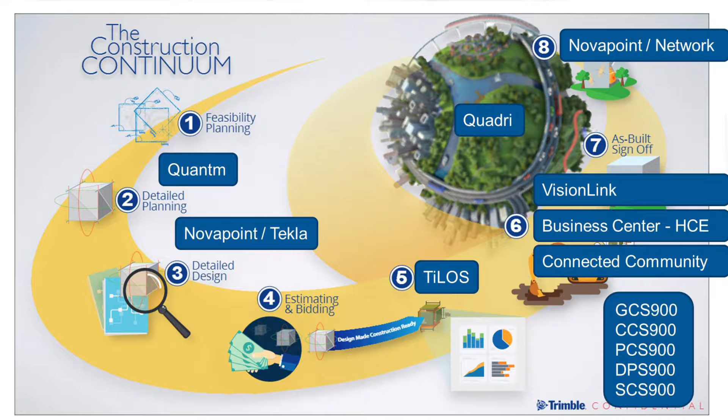And in the Trimble ecosystem, we are able to deliver the software, but also we are able to, with our partners SITECH and Geotrim, deliver all the equipment needed to make the thing happen.

In the Finnish market, we started several years ago the work on how to make this data flow more efficient, and it shouldn't be based on some programs. It should be open standards, where you are able to use the data in models and also get as rich information from design phase to design phase without losing data between those.

So in year 2015, we got common InfraBIM requirements - a documented way to make data models in infrastructure design. That was a huge job to do.

And as you see, everything starts with this Infra Model Data Exchange. It's a format - a LandXML based format, which has been made richer for the Finnish market. We call it Inframodel 3 LandXML, and you get the data from the software to the construction site with the Inframodel format, and you are able to read all the necessary information and metadata through the format.

But then we had a problem. We had the format, but people didn't know how to model things, how to name the models, what are the subsurface names, is it the top surface or lower surface - that discussion started. So we made this classification system for modeling purposes.

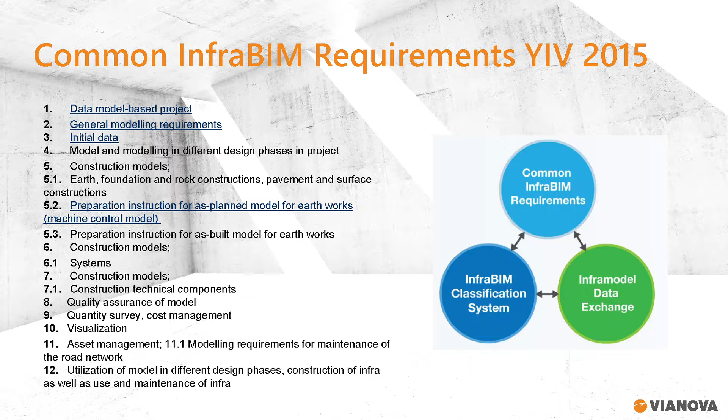And also we copied some from Norway - they have this Handbook 138. So steal with pride, use what someone has already done.

Maybe the most important thing is that it's under Building Smart. Building Smart Finland is responsible for keeping those requirements up to date. There's all the time something new coming to the data exchange.

Also, we fix the classification system and the requirements, and there is a group of people and specialists who are going through all the time the needs of the market and trying to respond to these issues as soon as possible. And then we share this information with all the people in the market.

There have also been over 35 pilot projects - it's in Finnish, but it's roads, railroads, bridges, streets, different types of connections with all of those, and then we have maritime or waterway projects where we have tested these requirements.

And all the pilot projects make a report back on what was good, what was bad, what we should develop further. But if you visit infrabim.fi/eng, you get the English version and you are able to read the documents.

Unfortunately, the pilot project reports are in Finnish only, but maybe the most important thing are these three issues. That was a big job to do, but nothing happened.

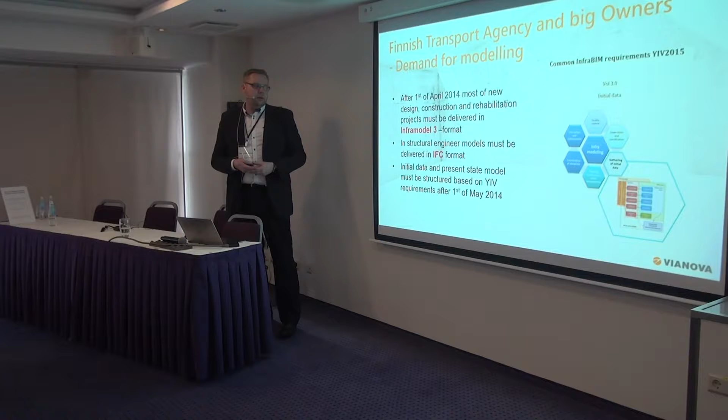Also, from the 1st of May, the initial data and present state model has to be delivered based on these common InfraBIM requirements. So everything has to be documented when you deliver to the next phase. That was a key issue there.

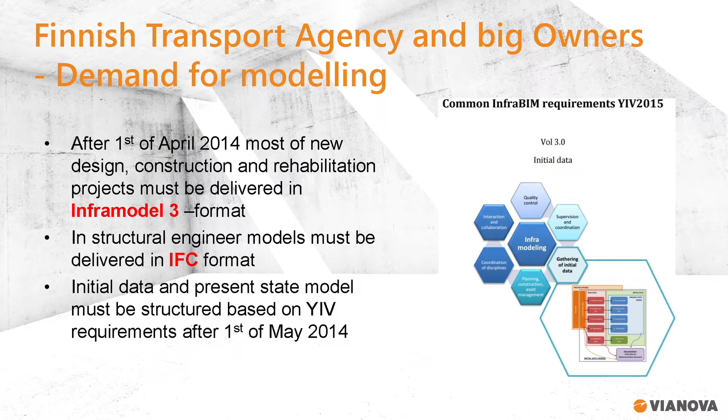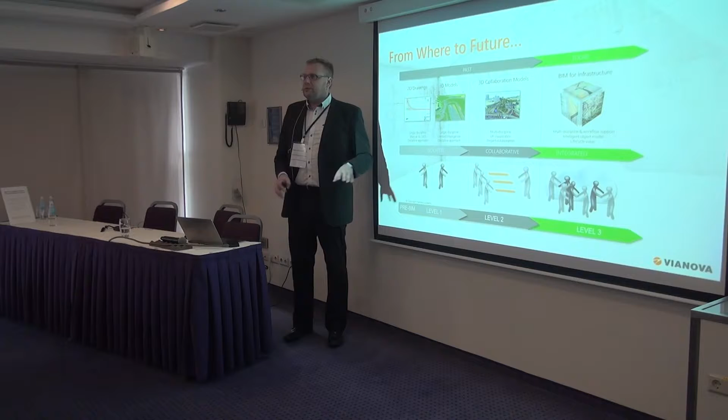There are quite many cities and municipalities in Finland, small ones, who are saying okay, this is the past and this is today, and they are almost here. So the scale right now in the market is quite large.

More and more people are coming to this phase where they take BIM into use because the value is there. But we are going very fast now to level 3. I think that's good news for us as a software vendor, but also for people who want to develop their business forward.

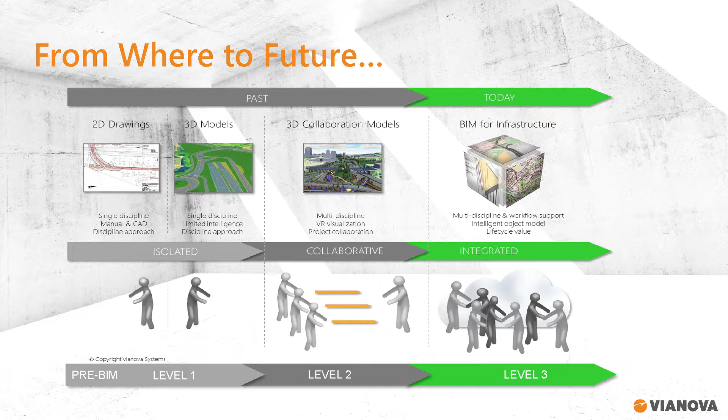BIM in project life cycles. So if we see where you can start to use BIM, actually we use it in conceptual planning already. We can make very good sketches.

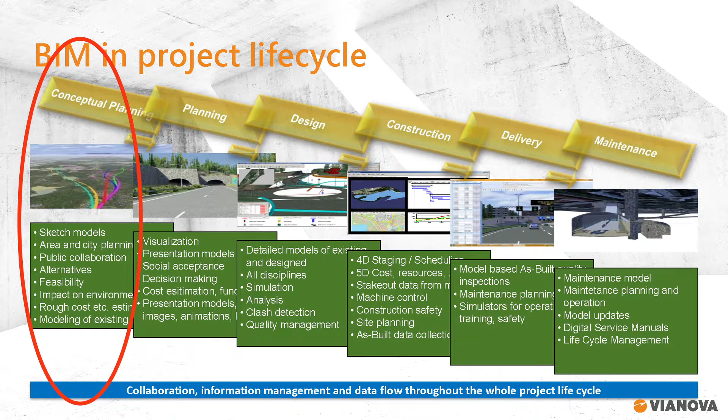In Finland we have an opportunity to use material from governmental sources for terrain models, very early in the phase already. It's almost free. And area and city planning, public collaboration, if you have lots of alternatives like this project, all the feasibility studies can be used in 3D already.

Why you should use it there is because when you go to the next phase, you get the model that has been used in the early phase. Then you are able to continue with the same model. And when you have documented where the initial model, base data and raw data has come from, and which date, then you are able to trust the material you have in your hands.

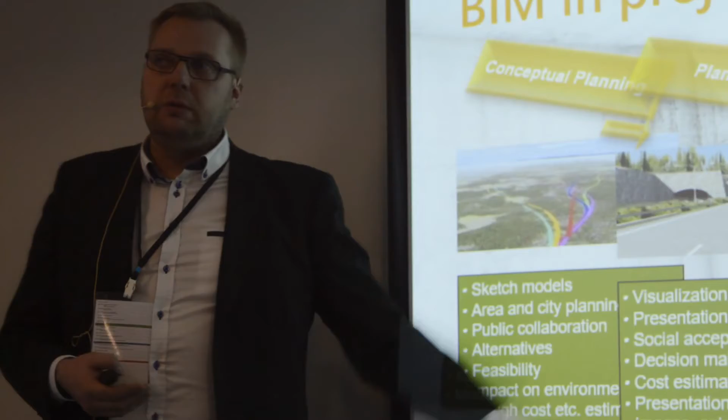Then you go to the planning phase, and there are lots of visualization and presentation models, because that's how you make decisions, the financial decisions and also the governmental decisions. In Finland we have a law that you have to ask everything from the public, so it's a very easy way to show the project properly so everybody understands whether it's a good or bad plan.

Also you are able to make very accurate cost estimations based on the model, because if you model everything, then you don't forget anything. That's much better than just saying it's 15,000 euros per meter. Now we get more accurate cost estimations.

When we go to detailed design, of course we get the data from there too. There was a calculation in past years that every time you go from phase to phase, about 30% of the cost in the next phase is used trying to find out what was done in the last phase. So basically now we save quite a lot of money moving to the more detailed design.

But when you have a model, you have the possibility to make simulations and analysis. More accuracy comes from there, and clash detection too, which matters especially in city areas where you have lots of things underground, like pipes, manholes, cables, and that kind of thing.

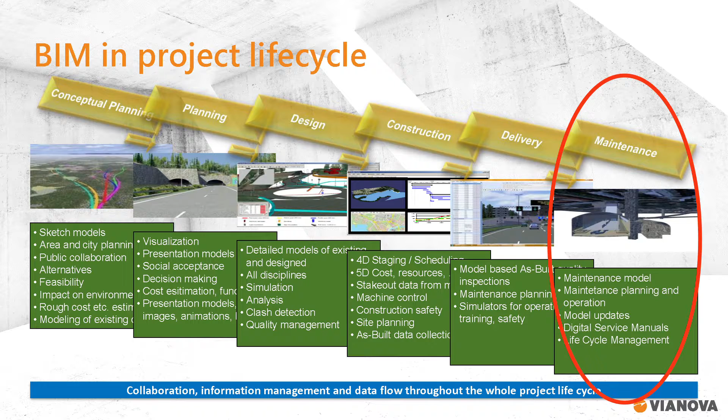I have some samples where you can use BIM for infrastructure projects. For example, the initial model is more and more important to get. I will show later a sample about raw data, how it can be used, for example, for pipelines. It's very interesting when you get the maps for cables and sewer lines or manholes.

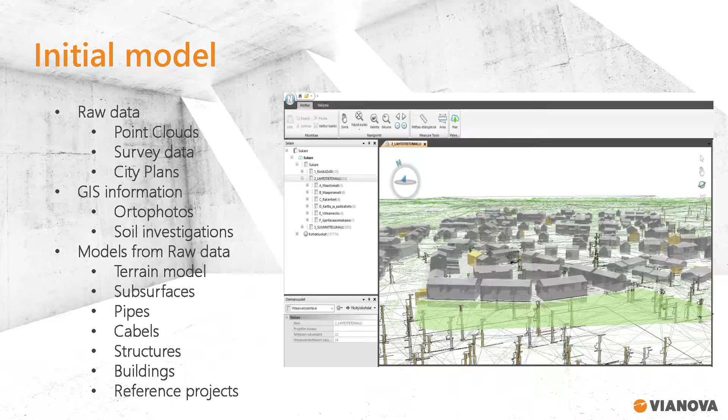Then you have a lot of, in Finland used quite a lot now, point clouds - more and more mobile point clouds, aerial, ortho, all the possible material. Then comes this traditional survey data: points, lines, surfaces, and city plans, for example.

Then you connect the GIS information like orthophotos or soil investigations to the same model. The key issue is that when you have one live model, you are able to share the data. Everybody connected to the project gets the real data all the time, and all updates are in one place that everybody can use. So you don't send lots of emails and text files.

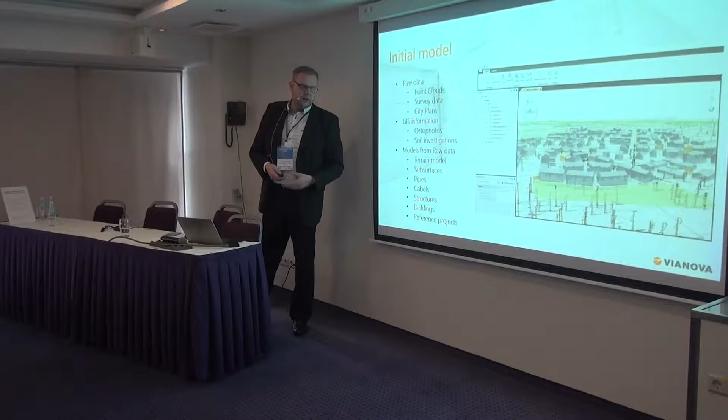Models come from the raw data - normally a terrain model, subsurfaces, pipes, cables, structures, buildings, reference projects. So everything can be connected to each other in these data model servers. This has been the key issue - we get much higher quality design, because this initial model is done in a more proper way than in old times. In old times it was a map, some 3D information, and lots of guessing.

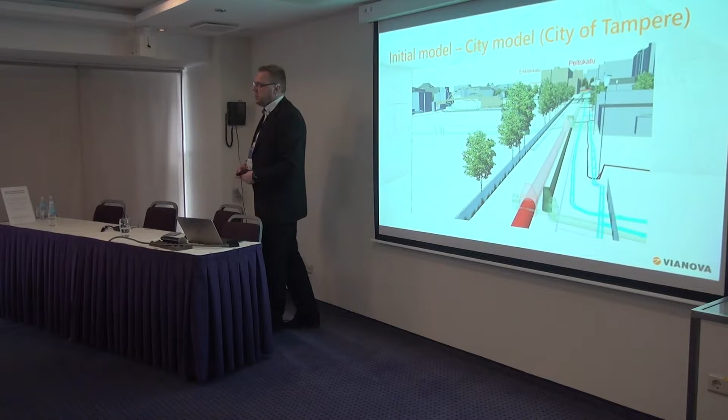Here is the city of Tampere, a quite large city with a little over 200,000 inhabitants. They have what's called a city model - it's a 3D model. If you go to the City of Tampere page, there is open data where you get the 3D model of the whole city. You can download it as a 3D DWG and use it, for example, in early phase design right away. They also have lots of underground information - all the bridges and things like that have been modeled there. So basically you can start quite well right away.

Also here you can see an early phase sketch - it looks quite good when you have orthophotos and city model and everything merged, with just one alignment made with the model. So it looks quite good for discussion with politicians, for example.

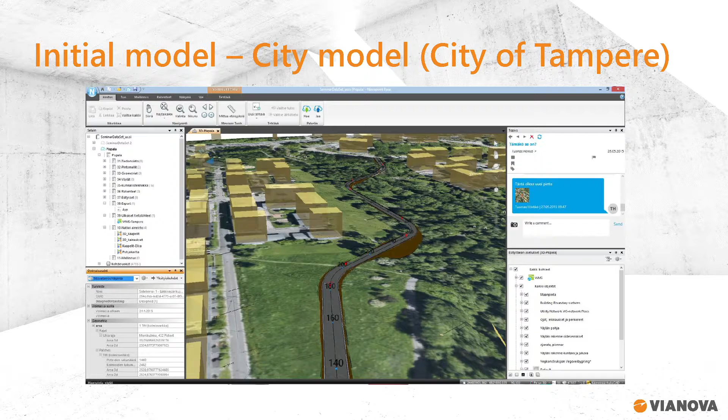For data management and analysis, you can take cross sections, get the 3D model, get the maps, connect the drawings to the model. There's one project where you can see that you're not able to do everything at once - you have to do it in different phases, otherwise you break something.

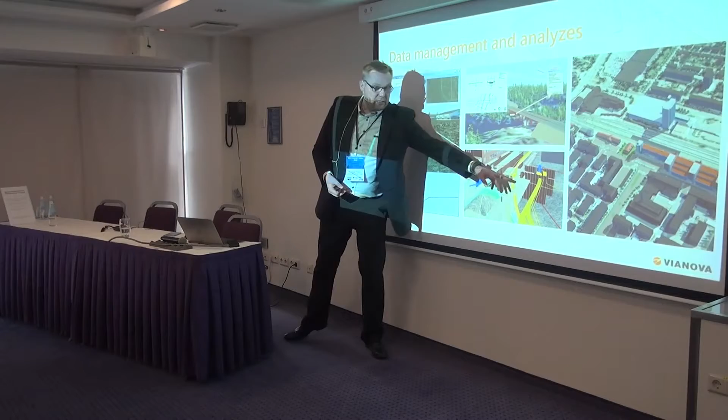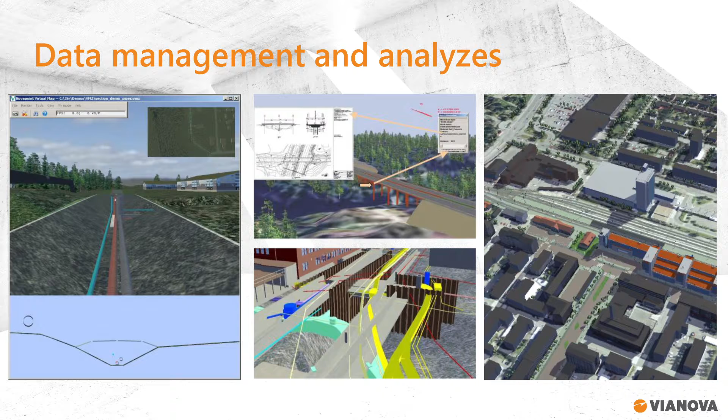Then there's the city of Oulu, where they made a shadow analysis. They were trying to find where the shadow falls, so you shouldn't build in the shadow.

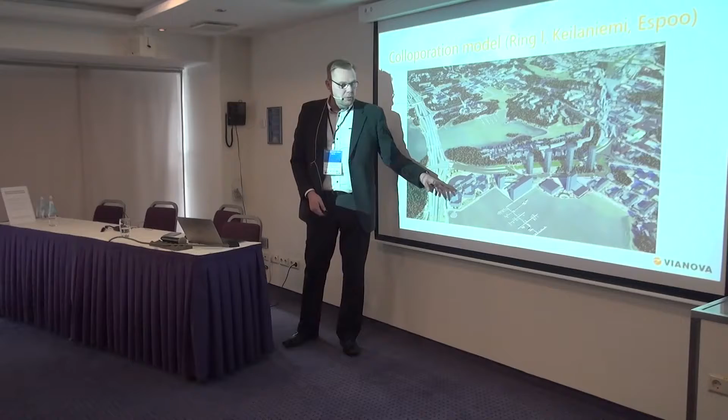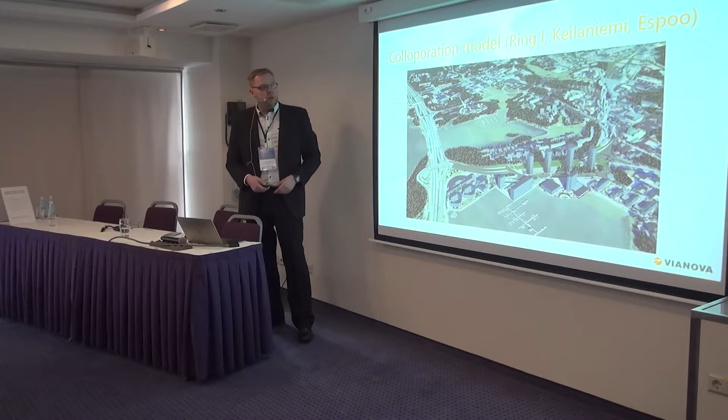Then there is a collaboration model - this is Ring Road 1, Keilaniemi, Espoo. This is Microsoft's headquarters, it was Nokia in past times. There's one big project on top of 3 other projects - a new metro line going underneath, a station area, then four huge buildings there, and the whole ring road will be changed. The traffic at this place is about 35,000 cars per day.

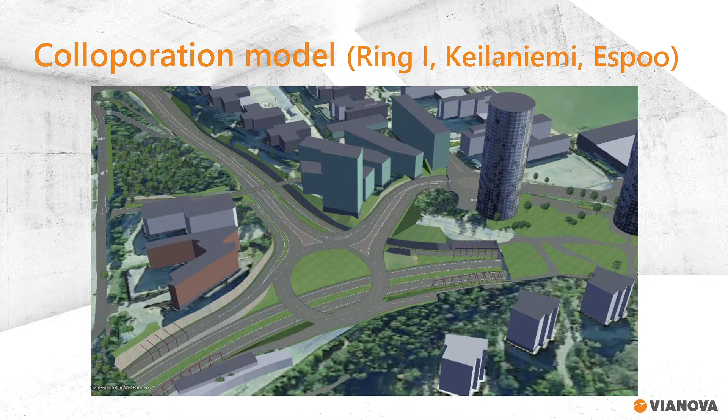The new road is coming to the same place where it is today - you are not able to close the traffic there. It will go down approximately 8 meters in the same place, so it's a very tricky spot. There were quite many alternatives used in early phase design to find the best solution, and the decision was made based on the models already there.

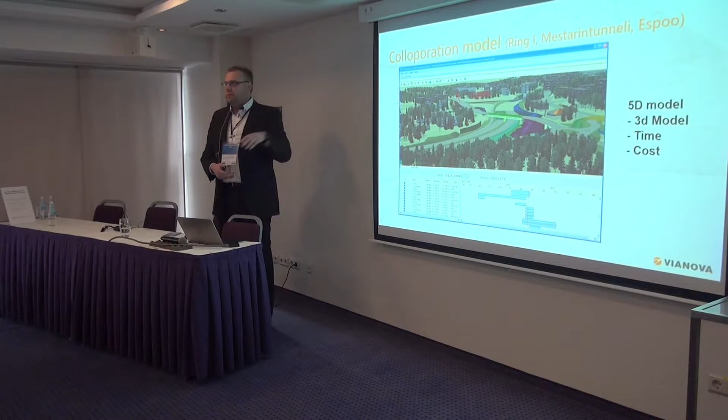Then on the same Ring Road 1, about 5 kilometers to the east, there was a tunnel project with lots of telematics under apartment houses, and traffic was high. They made a 5D model combined with a 3D model - time and cost were included - so it was a pilot for trying to merge these things together.

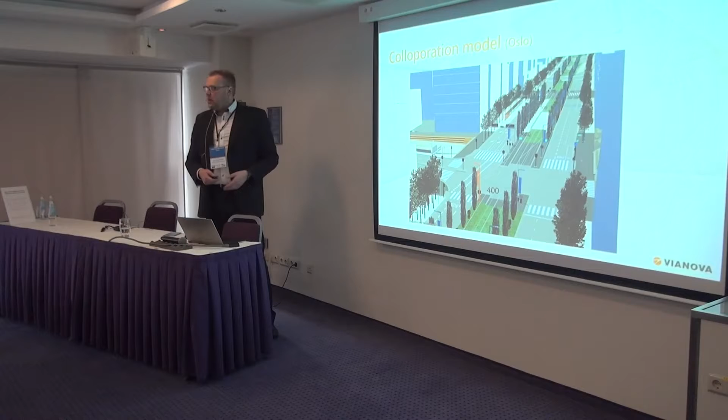In Oslo, this is the center of Oslo. Oslo railway station is on the left side, and on the right is the new opera house, if you have visited Oslo. This is an ongoing project right now. It always looks nice when you get the visualization, but all the stuff is underground, so there's lots of things to consider - lots of cables, and they have even modeled the trees underground, lots of pipes and cables. Of course, in the center you cannot break anything at the wrong time.

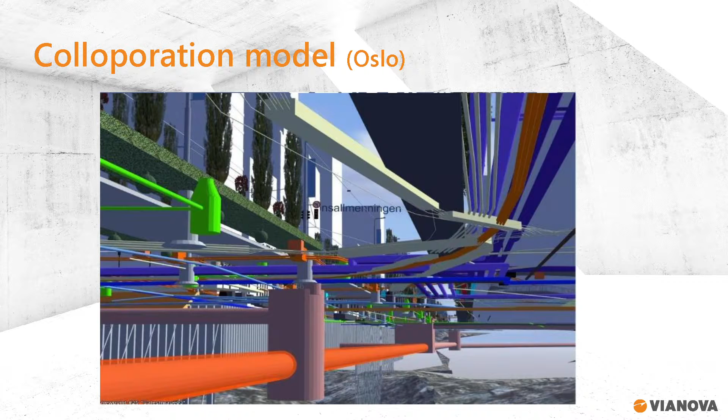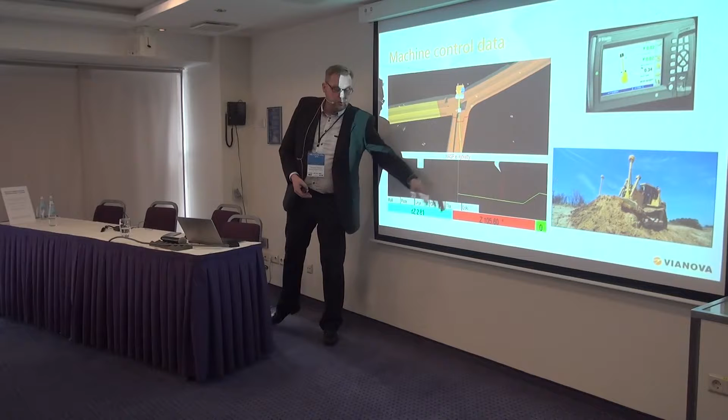Machine control data is more and more 3D in machines. So you just get the 3D model there, there's a cross section, there's a longitudinal profile. So actually the guy in the machine has a very good overview of what's going to happen, and you can also merge cables and pipes, so they know to be warned if there is something in the underground.

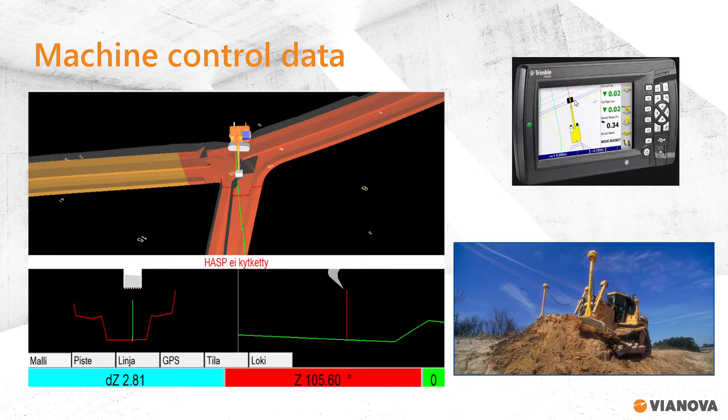You can see here the design model, constructible model, and as-built model. This is the city of Oulu, a small housing area, where they have modeled the cross-section. Normally, if you put it on top there, you can see how it goes. When they didn't have the machine control data, normally they cut everything away. Now they leave quite a lot of volume over here.

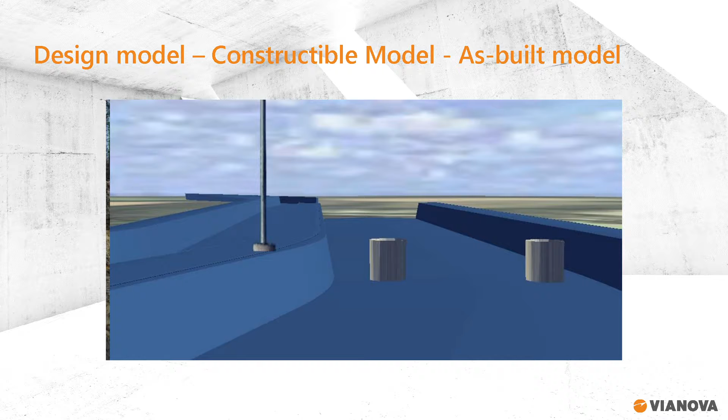And then they can have this in augmented reality on-site. And basically over here you can see that there's something wrong with the model and what they have done, so you can make quality controls also on-site.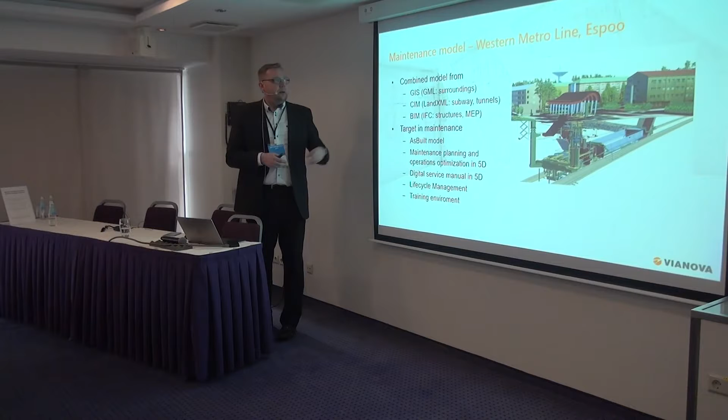Maintenance model, maybe the largest project I have been with. It's the Western Metro Line in Espoo, 13 kilometers, double tunnel. I don't remember how many stations, but many. Combined model with the GIS information, CIM, civil engineering models, and BIM, IFC structures and MEP. So basically they are saying it's several houses, and between those houses is a train. But it's underground, and a very, very big project today, about 1 billion euros if I remember right.

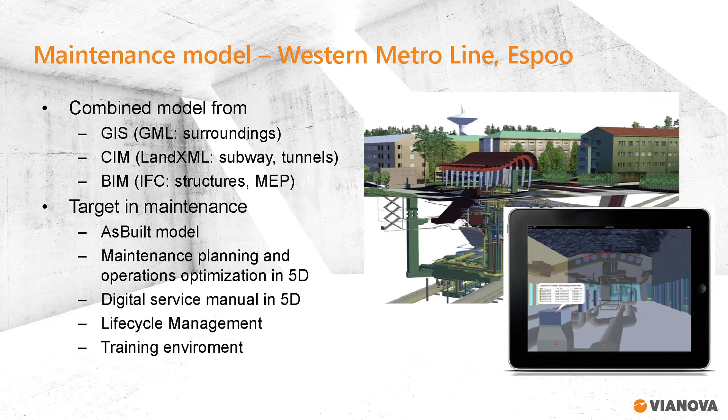The target for maintenance was to get the as-built model, and maintenance planning and operations will be optimized in 5D. Digital service manual in 5D, lifecycle management, and training environment. So basically, in that metro line area, about 2,000 firemen have to be trained for this metro line.

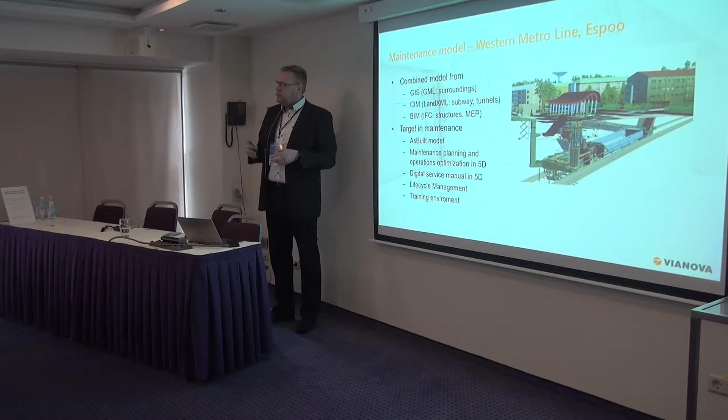Normally you build a metro line and then you go and learn and test and train on site. Now we made a game, and with the game they can go through the model before it's ready, and they can learn themselves, and then they only go once or twice to the real metro line. So basically you can imagine if they go there for 1 week compared to 2 days, times 2,000 people, times 3 days, and an hour rate - even if the hour rate is small, you save a huge amount of money there.

And then the service guys will have an iPad or some tablet or toughpad, and they go to service there, and they get all the information from this model on-site. Then we have 3D caves, big rooms, and so on.

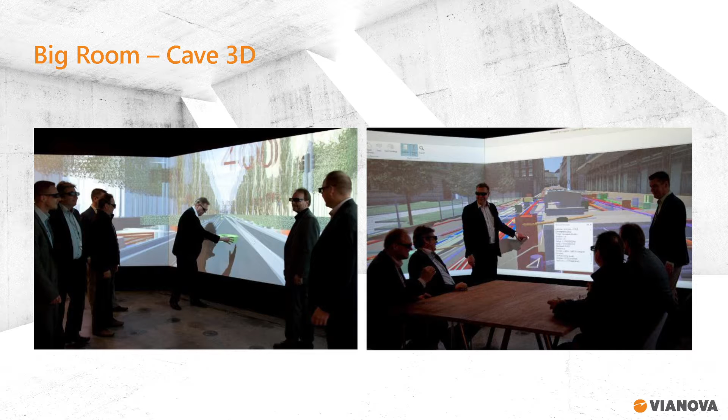Okay, let's go to the topic I promised to tell. So what we have learned about the model, we have done quite a lot of surveys. Where is the value of the BIM approach in the project? I think this was in Norway, what they checked. The major issue in past years was always asking, for this size of project, should I use BIM or not?

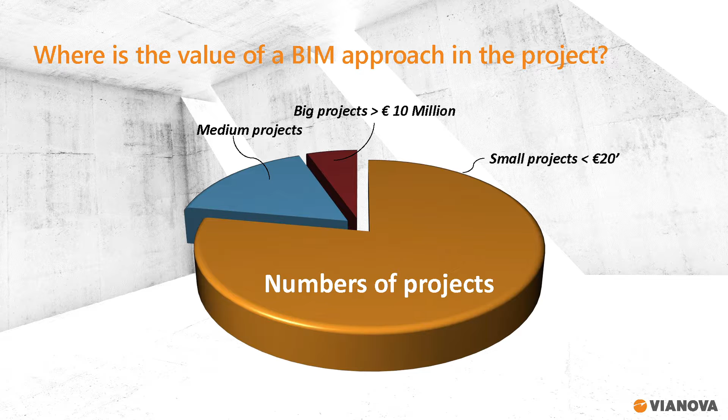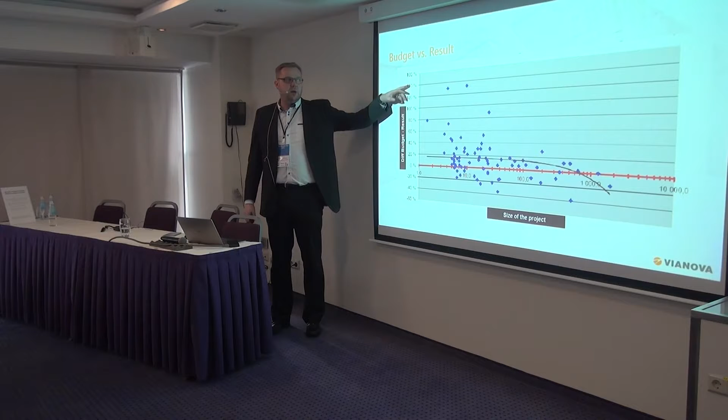So then they were going to compare the budget versus the result - the difference between budgeted and result. You can see it's 140% over, and in bigger projects, of course it's big money if it's only 5%, but the volume of small and middle size projects is huge. So basically the result was you should use BIM all the time, it doesn't matter if it's big or small. If you use BIM, you get added value from it.

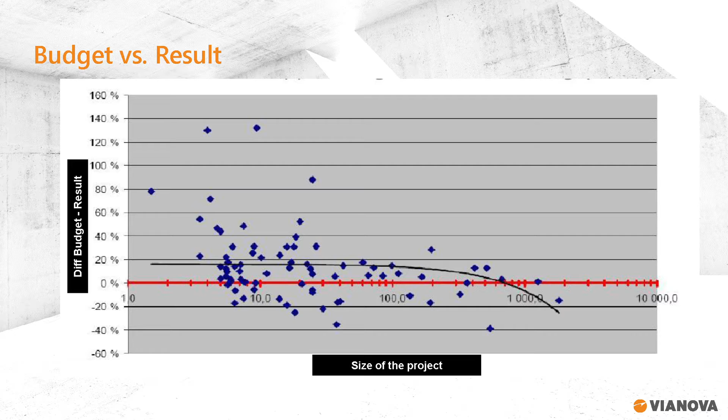But basically, the more you use BIM, the better result you get. It's a learning process - it's not that you get it right away, you have to learn and use the right techniques to make it work. There is what is the added value, and communication is maybe the largest issue. So you don't make iterations with the other designers - you go through the whole process and everybody knows you're going the right way all the time. So that saves a lot of time and money there.

In Tramline in Tampere, there was this performance issue. Also, it's an alliance project. There is City of Tampere, VR Track, Jaakko Pöyry, YIT, and those companies have merged together in the alliance, and everybody sits, the owner also sits, on the same side of the table. I don't know if you know the alliance model.

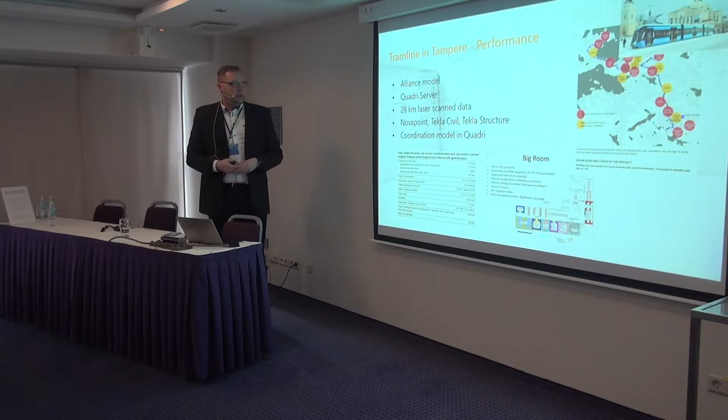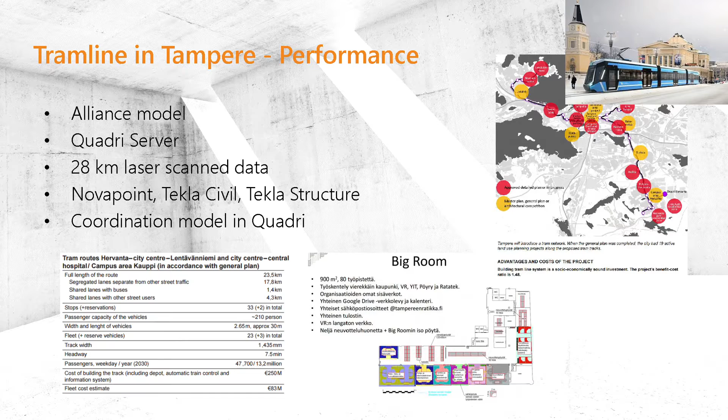They have a Quadri server over there, and there was a large amount of data, and they used lots of different types of products. Also structural design was involved because there was this service area for the tram, and the coordination model was always in there. They used cloud service for the data model, and they had a big room with 80 designers in the same premises all the time, working all together. So it's a very efficient way to make a design there, with different companies involved.

In Norway, this Ring 3 Ulven project, the Norwegian Road Authority calculated the average cost per change if you change the traffic sign place, manholes place, and so on. The average cost was about $9,600. There was part 1, where the BIM model was not used. About 250 out of 600 changes were caused by design conflicts between domains. They calculated it was about $2.4 million, approximately 4.6% extra cost there.

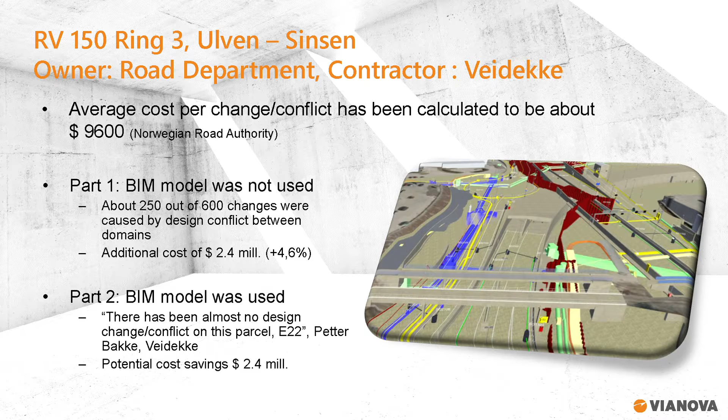And there is a BIM model in part 2. So those were the same project but divided into two. There was almost no design conflicts. So basically you can calculate the potential cost savings there, though the size of the project on that side also wasn't the same.

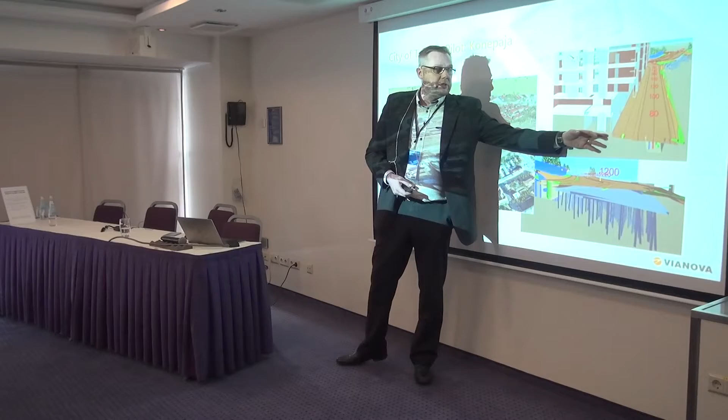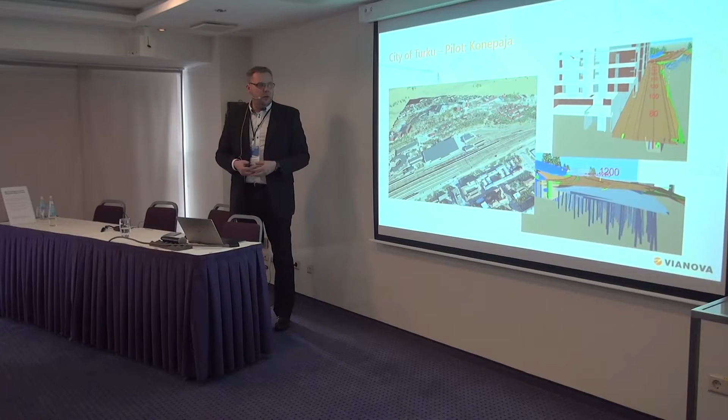City of Turku, there was a pilot. It was an old train service area, which becomes a new housing area. The street design was very connected to the apartment houses. So basically there was a house and a street, and actually the structure was the same. Also lots of things were modeled under the geotechnics because it's old sea bottom and there's lots of clay in that city.

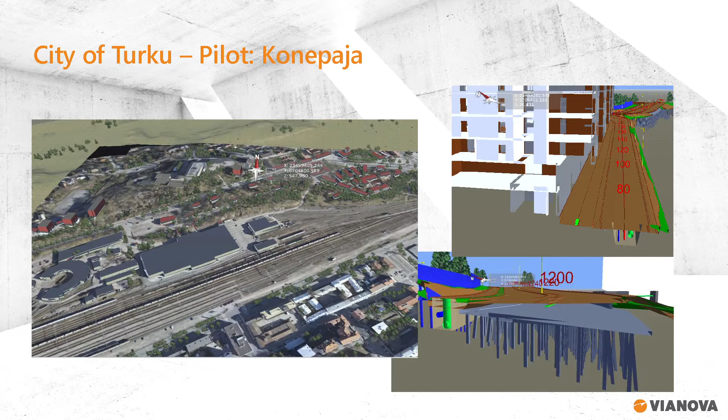So the pilot was focused on testing these modeling requirements, and what they went through is what they wanted to deliver. In the invitation of tender, they said, okay, we want the raw data like this, initial model like this, model description documented, and model in standard formats. The main issue was that the client should also audit and check that they will get what they have ordered. In many projects, people say they did it model-based, but they haven't checked - the owner hasn't checked.

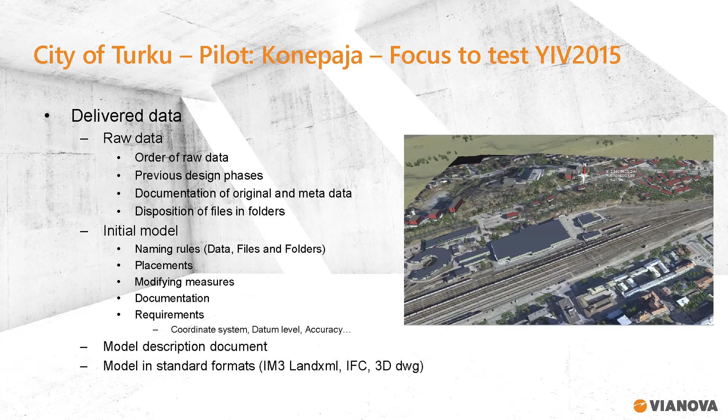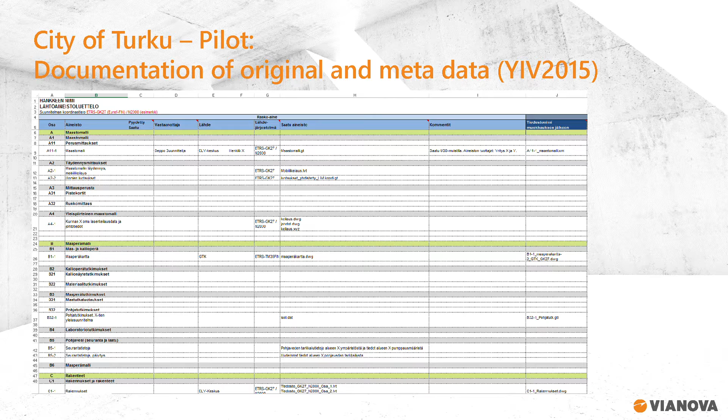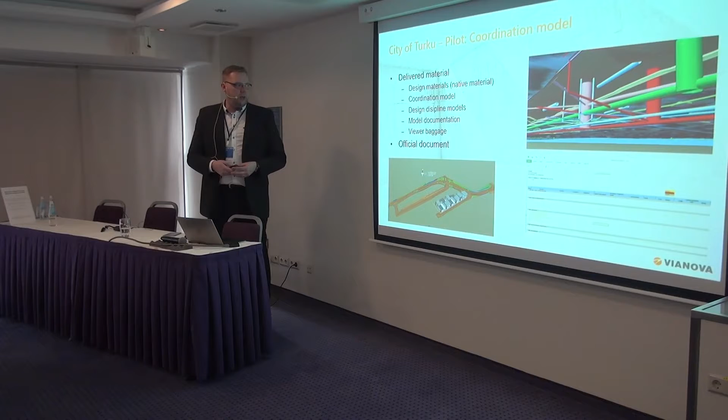And what they got as a model - the whole area was modeled and the model was delivered to the customer. There was all this design material, also the native design material, not just standard formats but also native, coordination model, design discipline models. All these IFC models were also delivered, not just the coordination model but also the design discipline models, model documentation, and also a viewer package so that as a client they could go through the model in their own time. And of course, official documents.

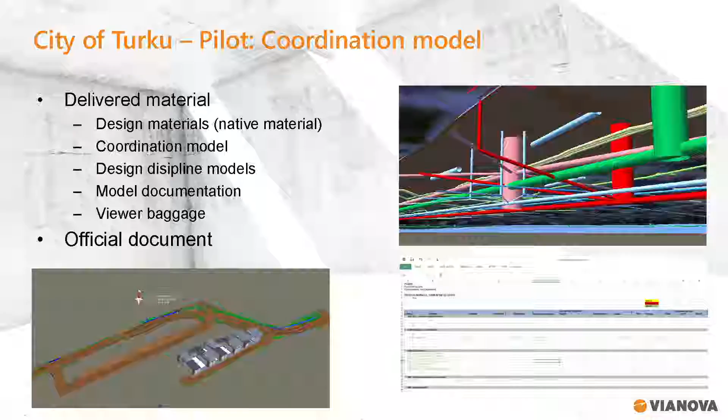Because you are in the city area, the drawings are still there, so it's not just a model-based process there. But that's a big wish now, to get some disciplines to model-based. And I think in bridge design in Finland, some documents can be in 3D.

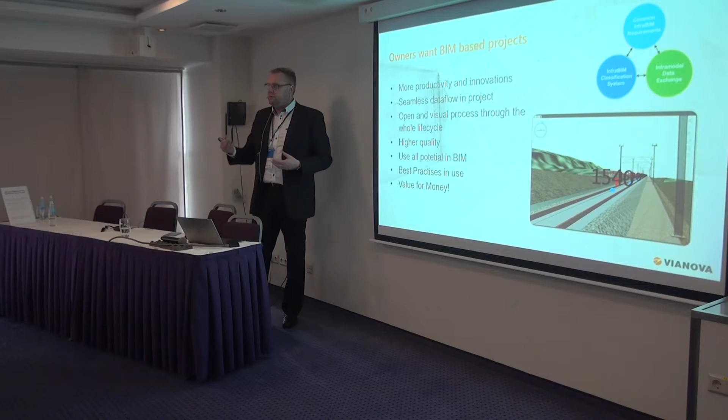How to continue from here? Owners want BIM-based projects. So basically the requirements are there for more productivity and innovations. They want service providers to make more innovations and get more potential out of the modeling. The seamless data flow in the project, open and visual process through the whole life cycle - there are lots of owners now who want to see the model in the whole process. When they have project meetings, they want to see the model, not the drawings - the model. That's the key issue we try to move forward now, because it's much faster.

Especially in places where you have a multidisciplinary project. Higher quality - that's already seen, and that's going to be measured. And use all the potential in BIM. Best practices in use and value for money, that's the issue there. Not BIM because it's cool, BIM because it's valuable. That's the main issue there.

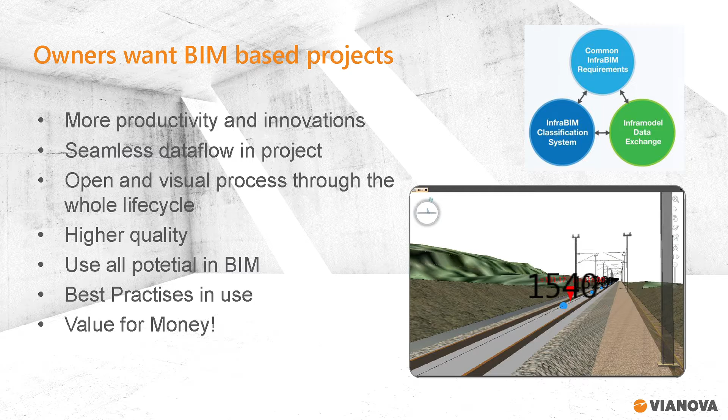There is lack of communication all the time. As a Finnish person, I can say we don't speak. If we are drunk, we speak too much. And if we get more drunk, we sing. But that's the designers - everybody wants to do their own issue there and doesn't want to share the information. That has been a problem for many years now.

But now modeling gives a tool for that. Modeling is part of design, not its own phase. This has been a problem all the time when we have done this BIM integration to our market. People make the design in the traditional way, they deliver official papers, and the customer is asking, where's the model? We will model it afterwards. That's not the purpose - you model and make the drawings about the model, not vice versa. That has been the problem in the pilot projects. And now we have seen how people learn to make design really model-based.